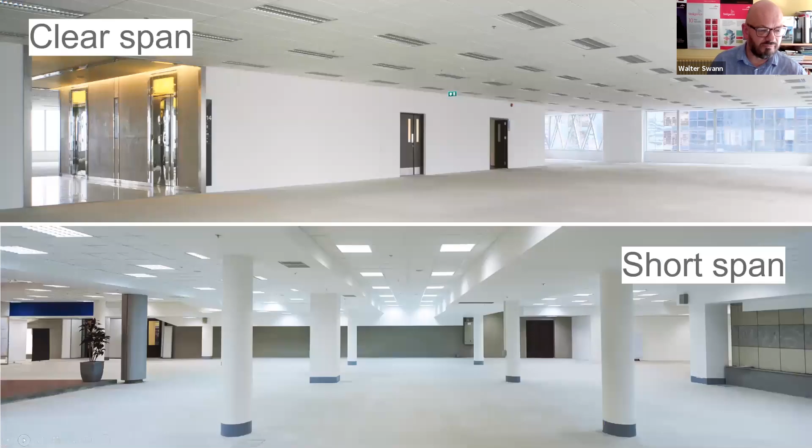But this one, as Justine said, is purely focused on the office sector. So the first image, we've got two photographs for you: one of a clear span kind of office block, and the other one of a short span solution to a similar type of building. Hopefully there will be a question which will pop up on your screens.

We really just want to get an idea of what your views are in terms of both cost and the environmental impact. Do you think that the clear span solution is going to cost more? Do you think that the clear span solution will have greater environmental impact? Now, the mischievous people amongst you may want to play a game and really knock us off track, but it'll be good to know what you think.

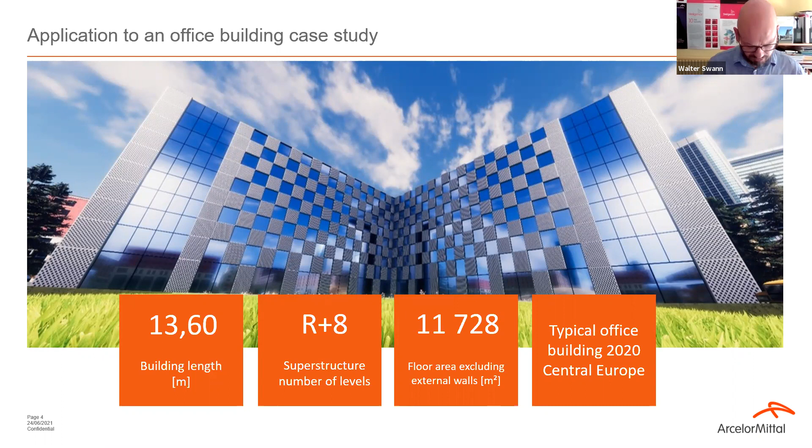And with that brief, they then took a look at the way that that sort of building would be built in Central Europe today, and they did that by doing a little bit of market research.

So those were the two schemes that they looked at, with that baseline scenario representative of European practice being used as the control, and used to measure the ArcelorMittal best-in-class solution scheme against.

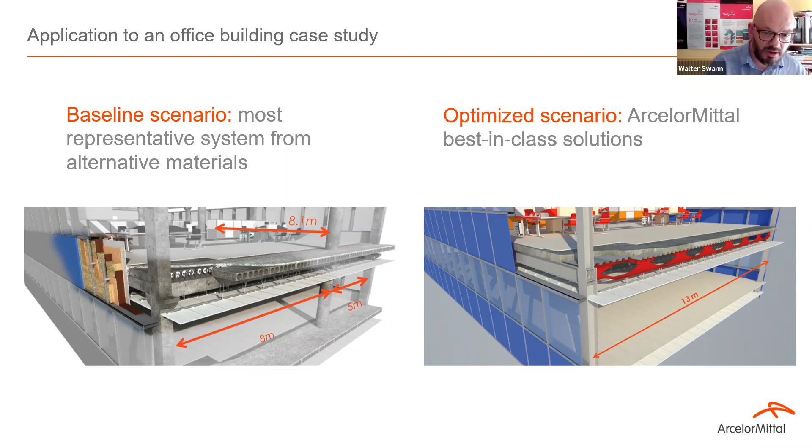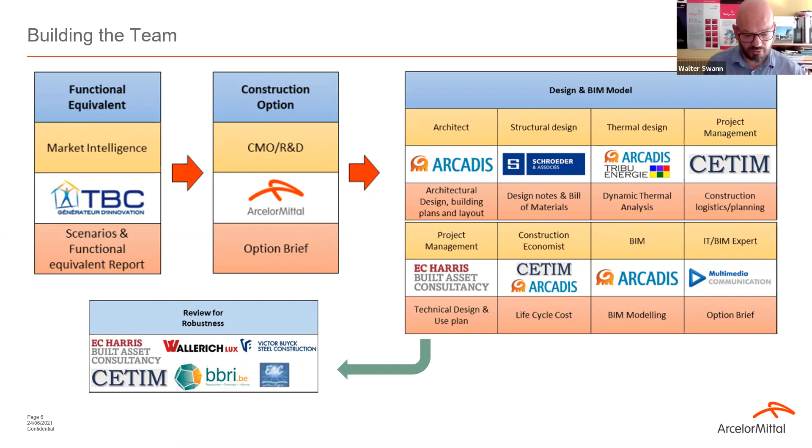The next step in the process was basically to establish the framework and the metrics that we'd use as the basis of assessment.

So 17 indicators were chosen, and they included environmental factors such as energy efficiency, consumption of natural resources, end of life scenarios, and reuse and recycling benefits. We also looked at the economic aspects of the build as well.

That involved a life cycle cost assessment before use, but also during the use stages as well. We also looked at speed of construction and the quality of construction.

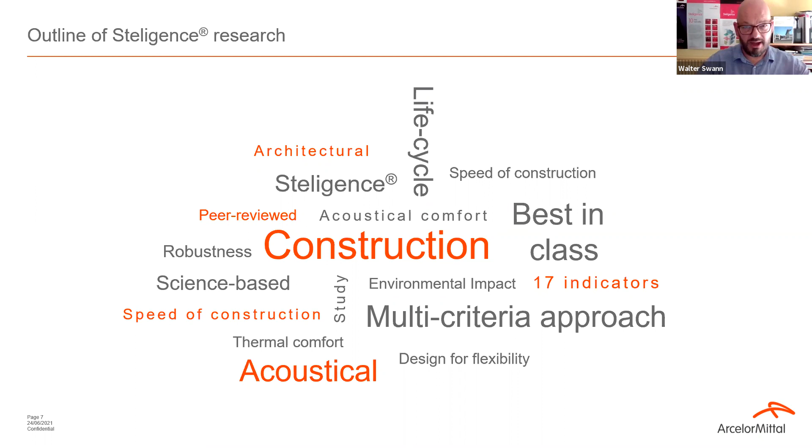And then in terms of the social factors, we looked at thermal comfort, indoor air quality, acoustical comfort, and design for flexibility, and tried to embody all of that in the assessment of the two schemes.

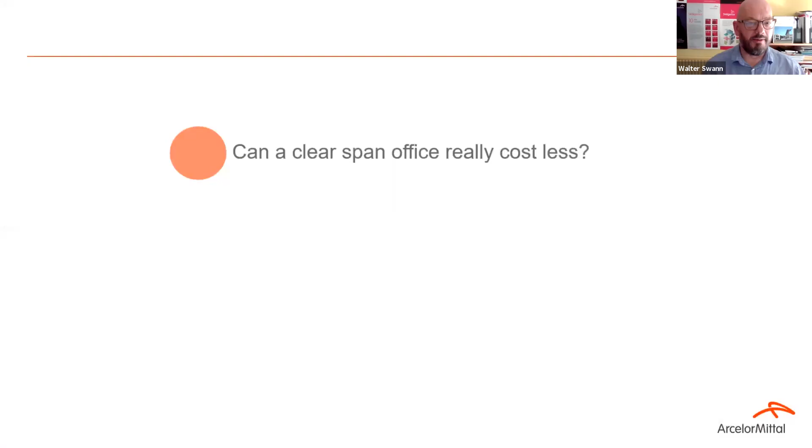So moving on to those two questions, and trying to tackle the first one: can a clear span office really cost less? And of course, the simple answer is, well, yes, we think it can, and that's what the study demonstrated to us. So what sort of things made that possible?

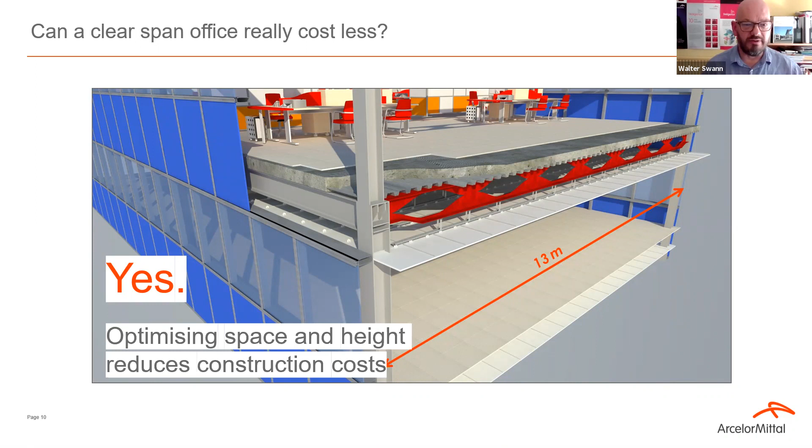Well, really all of the work was in the floor zone. That was the key to it. And the element which played a significant part in that was the beams, the Angelina beams, because that allowed us to integrate the structure and the services, which allowed us to engineer the overall floor zone down slightly.

That had a knock-on effect in terms of the total building height, which reduced, and of course that had an impact in terms of the facade area that we needed, and therefore the facade cost too.

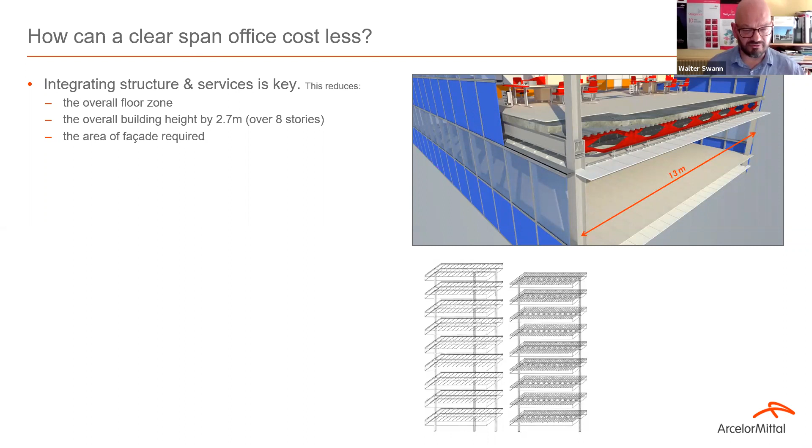Those Angelina beams, because of the web penetrations, allowed us to pass services through the beams. But they also created that added value, which is sometimes a difficult thing to put a price on, but it allowed us to eliminate that central column and give something which was much more flexible in use, and would possibly allow a longer design life as well.

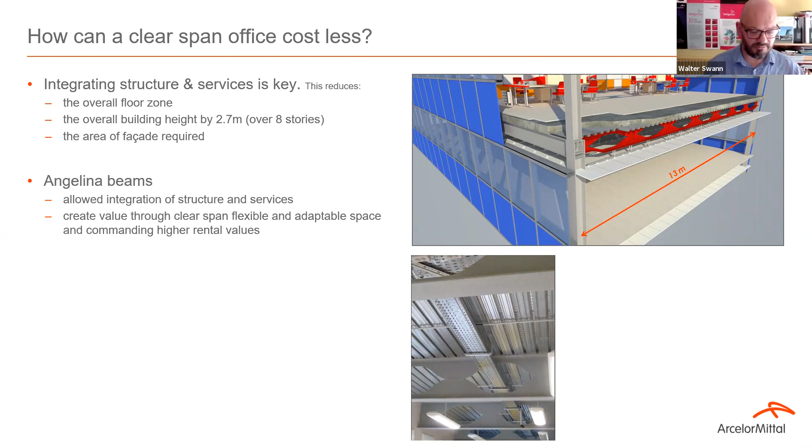We also employed a decking product of ours called Cofraplus 60, which allowed us to reduce the construction depth of the slab. It's a trapezoidal profile in metal, and it effectively uses less concrete and also less steel compared to some of the decking profiles as well.

But you can see from the diagram at the bottom that those two things allowed us to reduce the overall floor zone by 300 millimeters per floor compared to the base case.

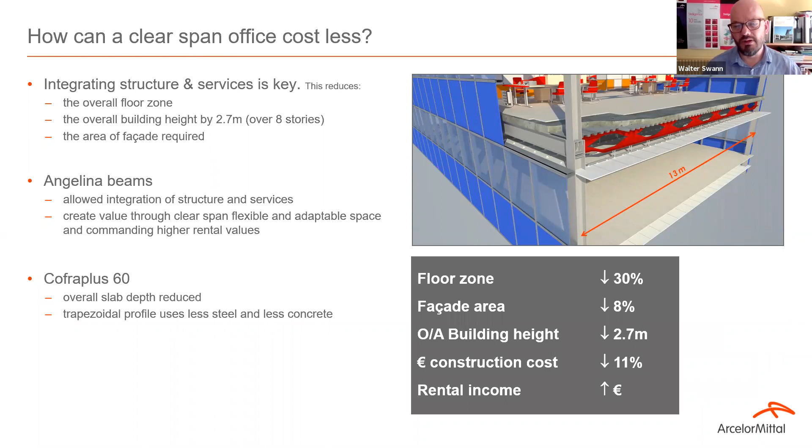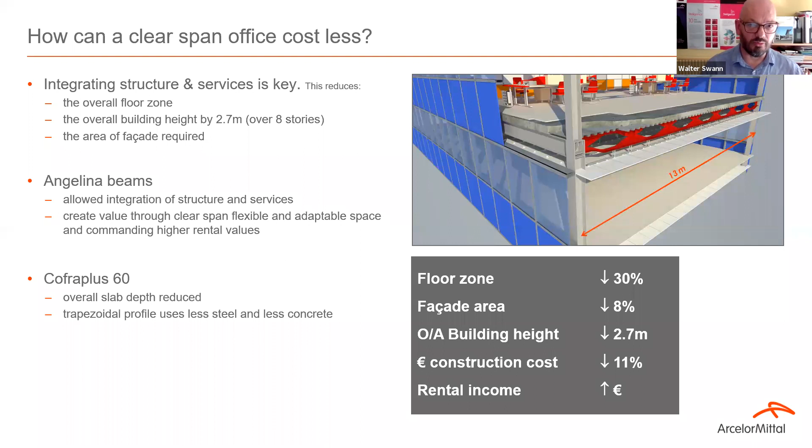So when you couple all those things together, you got the reduction in floor zone, the reduction in facade area, the reduction in overall building height. That led to a reduction in total construction cost of 11%. And because of that longer span, you're actually increasing revenue as well, because you've got something which is more marketable on the rental market.

I'm just going to sidetrack briefly and talk to you about Angelina Beams. Some of you may be familiar with castellated beams, you may be familiar with cellular beams. The Angelina is a variant of that process, which is particular to ArcelorMittal.

Similar process - you've got a one-pass cut, which is variable. The geometry of the cut is variable, and you can engineer that as part of the design process. You separate the two T's after you've cut your parent section in two, flip the bottom T through 180 degrees, and then bring those two T's back together and weld them together.

What you end up with is a beam which is probably 50% greater in depth, so it's 50% stronger for the same weight of material compared to the parent, and probably about 100% stiffer as well. So you're getting the steel working harder, in very simple terms, with the ability to integrate the services in the case of a floor beam.

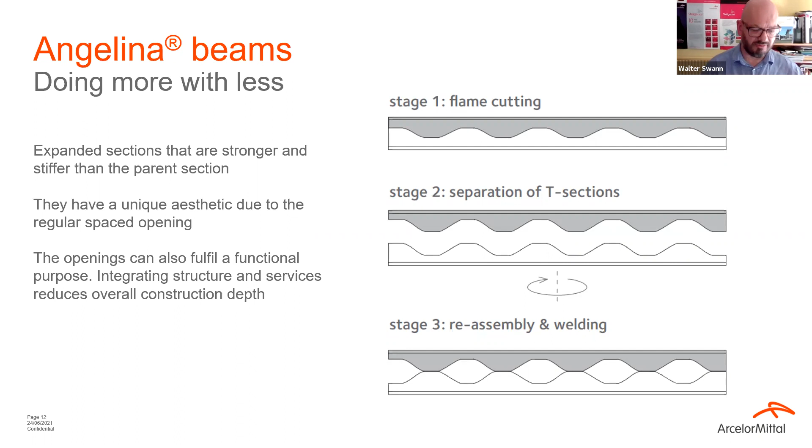The openings themselves, as I mentioned before, can be engineered. The key thing about any kind of cellular beam is to have an understanding of the secondary vierendeel effects around the openings, and to have a rough idea of whether they're going to be significant in terms of the design or not.

Generally that relates to the load placed on the beam. If you've got a light load, such as in a roof application, the vierendeel effects around the openings generally aren't significant - they don't dictate the size of the beam. That means the openings can be more generously sized, and effectively you maximize that lever arm between the top and bottom T's, which gives you a much lighter, much stiffer, much stronger section.

When it comes to a floor application, your loads have increased roughly tenfold. That means the vierendeel effects, that shearing motion across the cells, start to become significant in terms of the design, and that impacts the geometry you can choose in the cut. It generally means the shape of those openings has to be a little more modest. So: roof applications, big opening; floor applications, smaller opening to control the vierendeel effects.

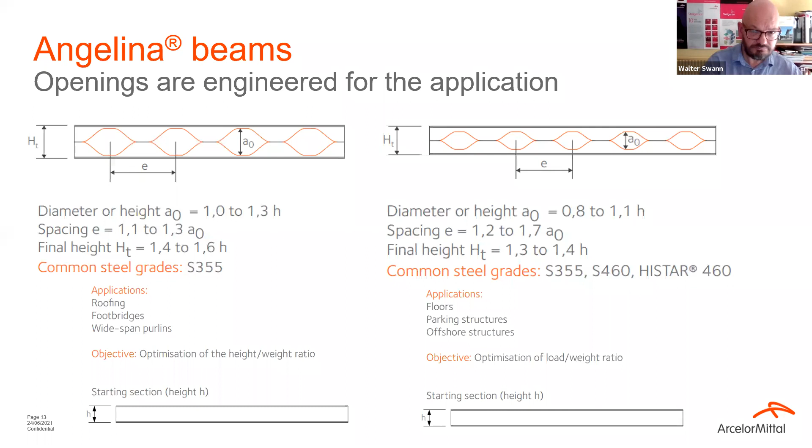So that's a very brief introduction to Angelina beams. Just a brief visit to the Cofraplus - what is it? The Cofraplus 60 is basically a 60mm metal deck, a fairly common profile in the marketplace. This one is stackable, so it's easy to transport. It also has a trough spacing of about 200mm, which is a little different to some things anybody from the UK might see on the UK market.

So it means that if you need to get the shear studs that provide the connection between the beam and the slab working a little harder, that 200 trough spacing can help you. But in the context of the Steligence study, the contribution of that deck was actually reducing the volume of concrete required. And if you reduce volume of material, generally you reduce cost, and if you reduce cost, you'll generally reduce carbon as well.

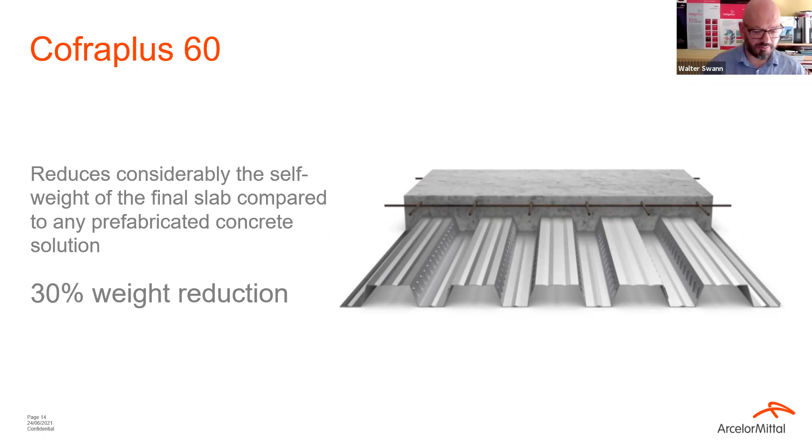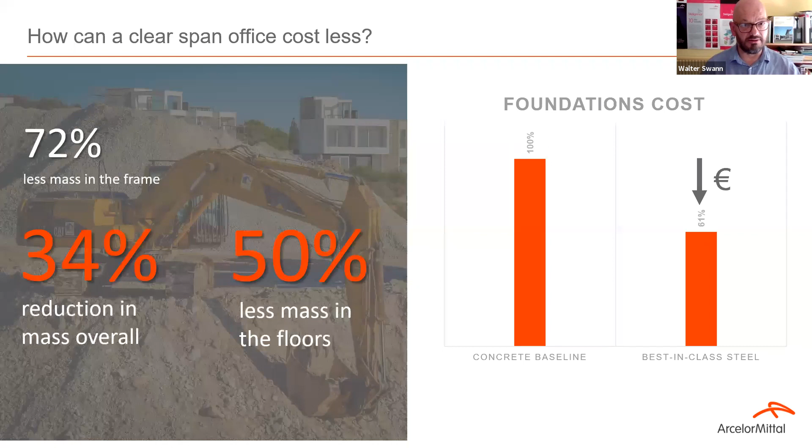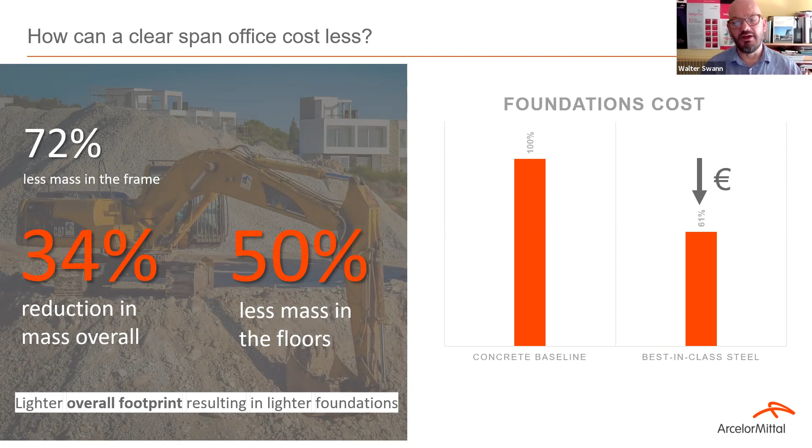So if we now take a look at what happens in the ground when you add all of those things together - when we looked at the steel frame, we found that the steel frame of the Steligence solution was 72% lighter than the base case. The floors were 50% lighter, and overall the building had 34% less mass. So that was a much lighter footprint on the ground, and that translated into both material and cost savings in the foundations.

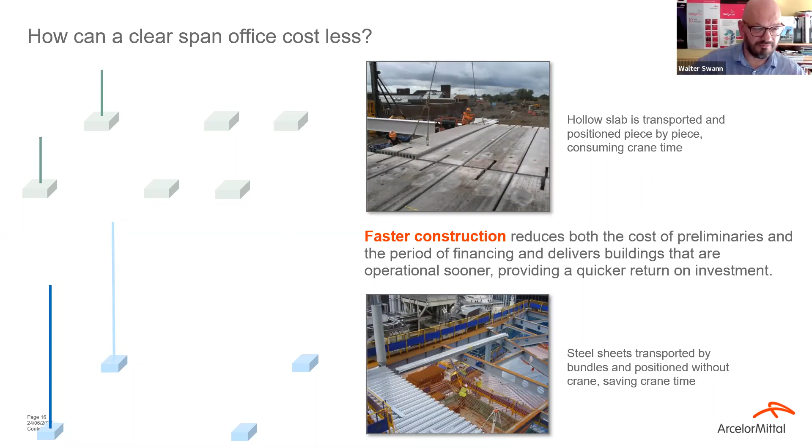The precast columns are generally quite heavy, so to some extent they're limited by how many you can get on a wagon, so they'll tend to be a one-story lift, whereas the steel columns tend to be three-story lifts, so they go up a little bit quicker.

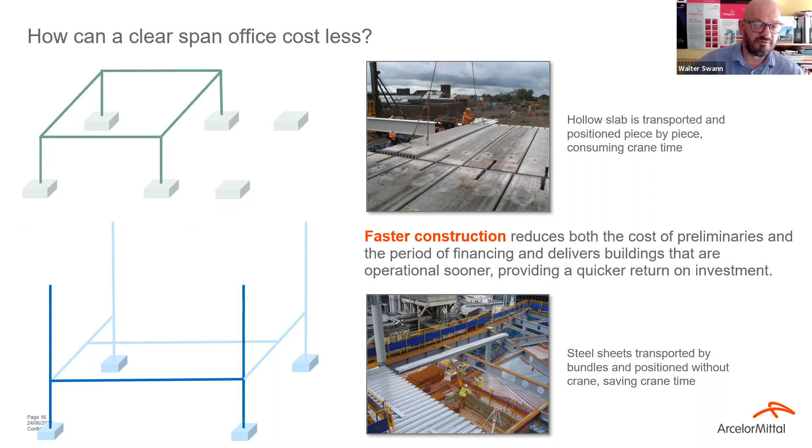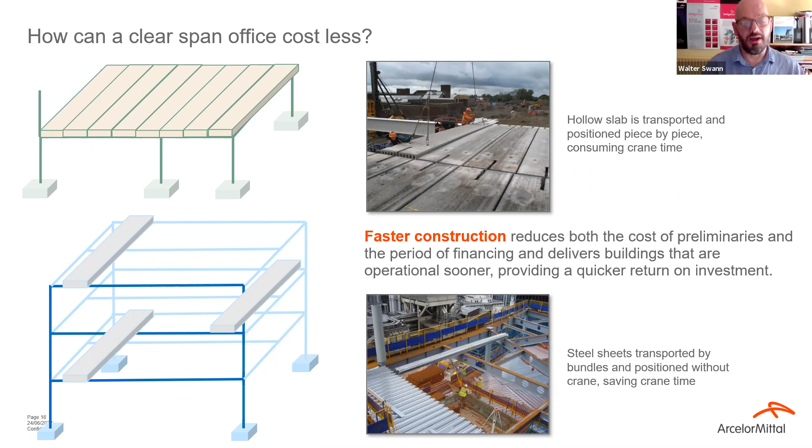Just to wrap that section of the presentation up, there are some direct cost savings you make by adopting that approach, and this is what the study showed: a 13% cost saving in the envelope, 39% cost saving in the foundations, and a 24% saving in terms of prelims and that type of thing, because the building was basically built 3 months quicker than the base case building.

That essentially means the client can get a return on his investment much more quickly, so you can get that floor space rented out and start generating income. So roughly about a 10% added value impact due to all of those direct impacts on the build of the project.

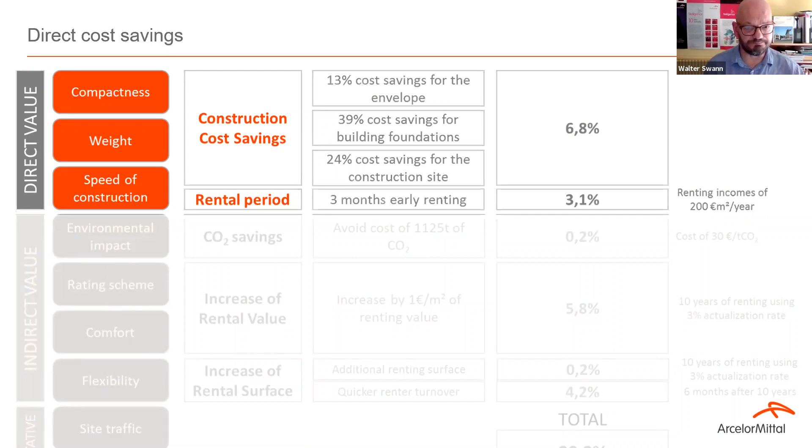But now moving on to the second question: can a clear span office have lower environmental impact? And again, no surprises here - those two questions we asked at the beginning were rhetorical questions. So again, the answer is yes, it does have lower environmental impact.

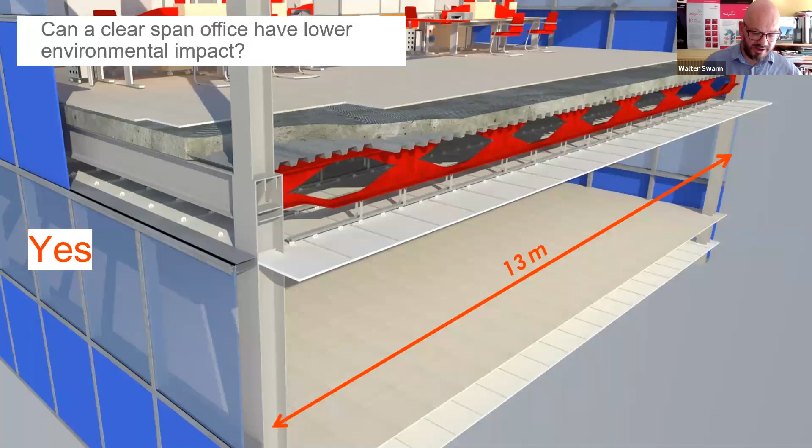So how, again, is that possible? Well, it comes back to that compactness - the ability to control the floor zones. As well as offering a cost saving, you also get a carbon saving or an environmental saving too.

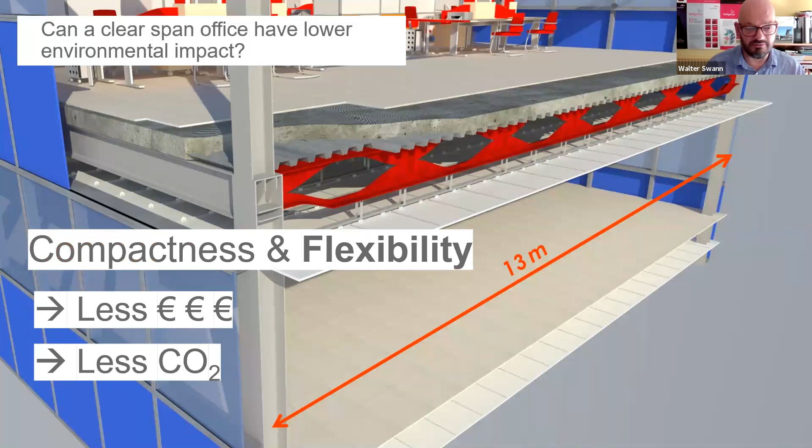Just drilling into a bit of detail here - what did the Angelina beams do? Well, first of all, they created value by taking out that central column. You've got a more valuable space, but they also contributed directly in terms of carbon reduction.

The Angelinas were designed in HISTAR 460, so that meant we could get the beams as light as possible, using the least amount of material possible. But with those holes, we could also maximize the web penetrations to give the maximum amount of space to pass the services.

The manufacturing process we use for our steel, the sections the Angelinas are made from, is an electric arc furnace process, so you've got a product with low embodied carbon. You've also got benefits in terms of reducing overall building height and reducing the cladding, which brings secondary carbon savings on the rest of the building.

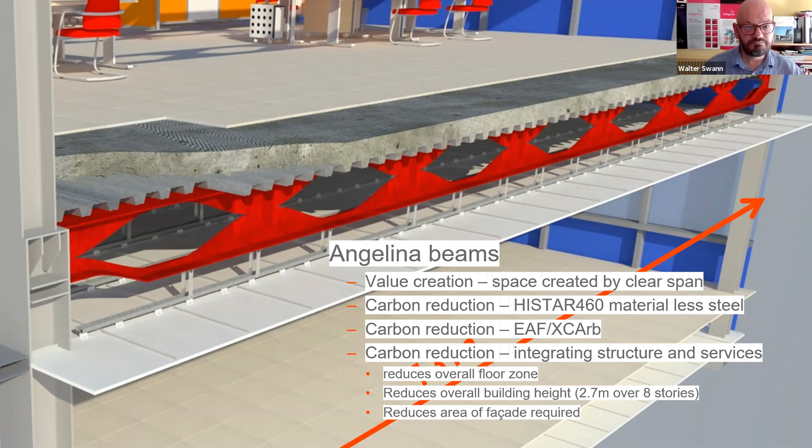If we move now to the Cofraplus 60, the sorts of impacts you saw in terms of cost also apply in terms of carbon. You've reduced the amount of material by using that trapezoidal profile rather than a reentrant profile, and reduced the slab depth, and that all translates into reductions in carbon and a reduction in the overall environmental impact of the building.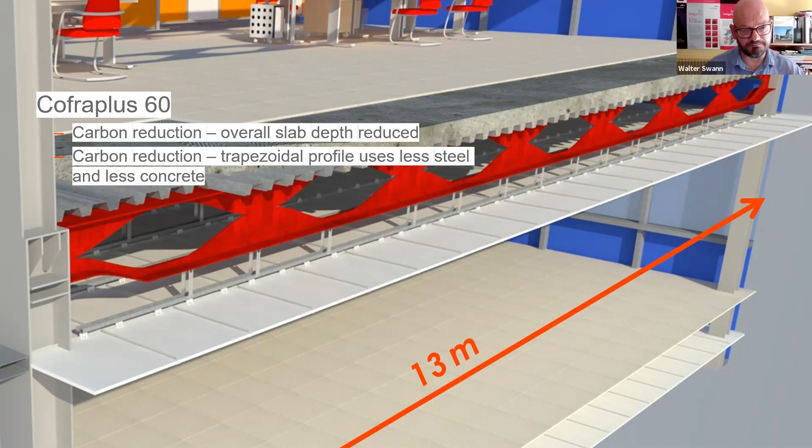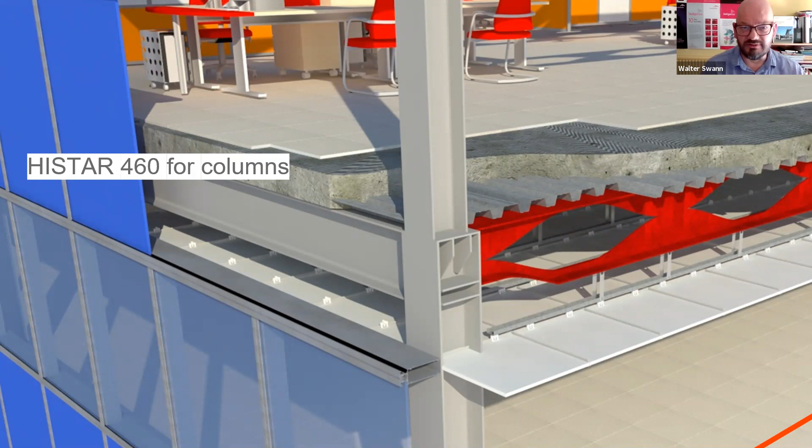Finally, looking at the columns, in the Steligence alternative we chose to use HISTAR 460 for the columns. My own personal view is this should be the default position for most multi-story buildings now, because straight away you get value creation, since your columns have a smaller footprint and therefore greater carpet area. Secondly, you get carbon reduction, because a 460 grade column will be lighter than a column in 355 steel. And compounded with that, the HISTAR 460 steel is made using the electric arc furnace process, which has a lower carbon footprint also.

And for both the Angelinas and the HISTAR columns, I'll talk about Xcarb, which is one of the latest offerings from ArcelorMittal, but I'll bring that up at the end of the presentation to explain what that is.

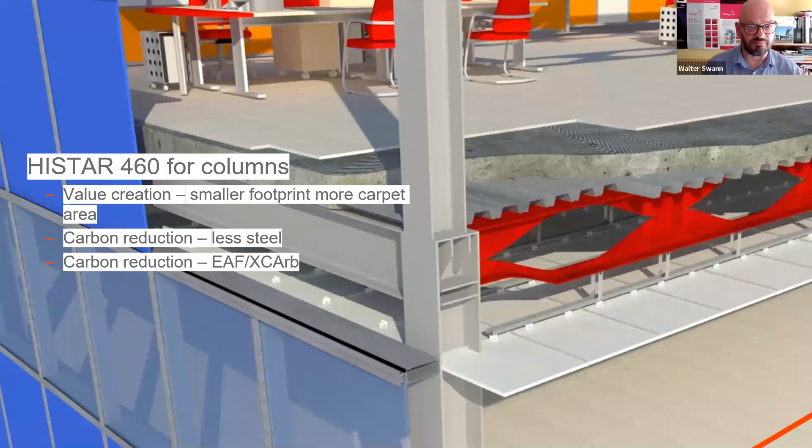So what did all that mean? Well, if we took those 17 metrics that I started with at the beginning of the presentation and put those into the magic box, effectively what that demonstrated is that the environmental impact of the building was reduced by 16% compared to the base case.

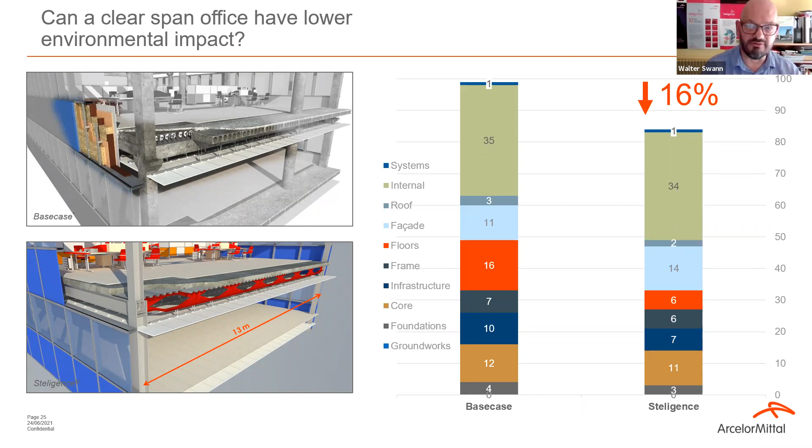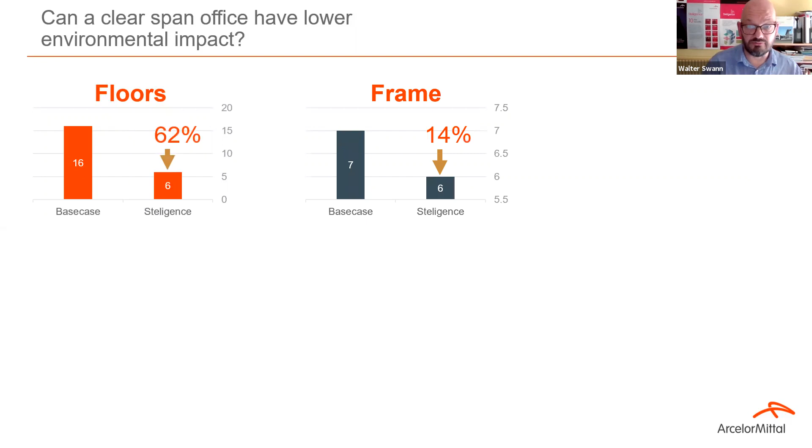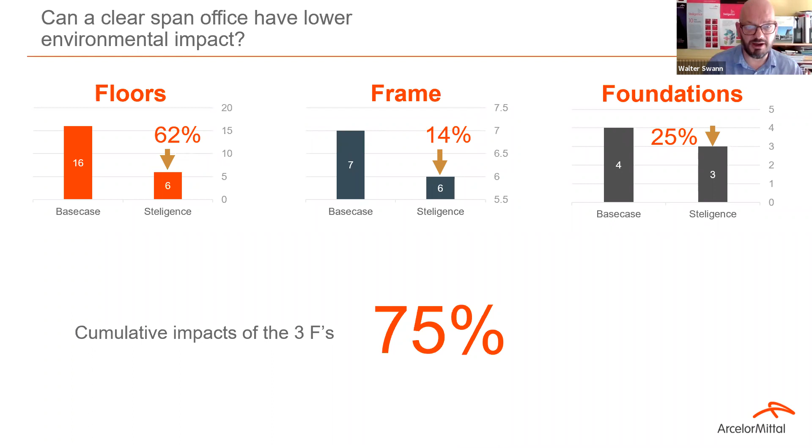If we look at the detail a little bit, if we look at the floors, the difference between the base case and the Steligence option was a 62% reduction in environmental impact. In the case of the frame, that was 14%. And in the case of the foundations, that was 25%. When you put all that together, those three elements, the three Fs, floors, frame, and foundations, accounted for 75% of the reduction in environmental impact between the base case building and the Steligence building. So a lot of the opportunity to reduce environmental impact lies with the structural engineer.

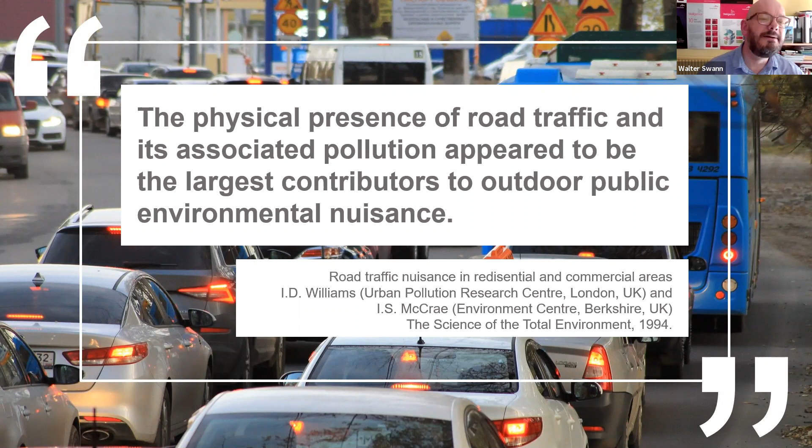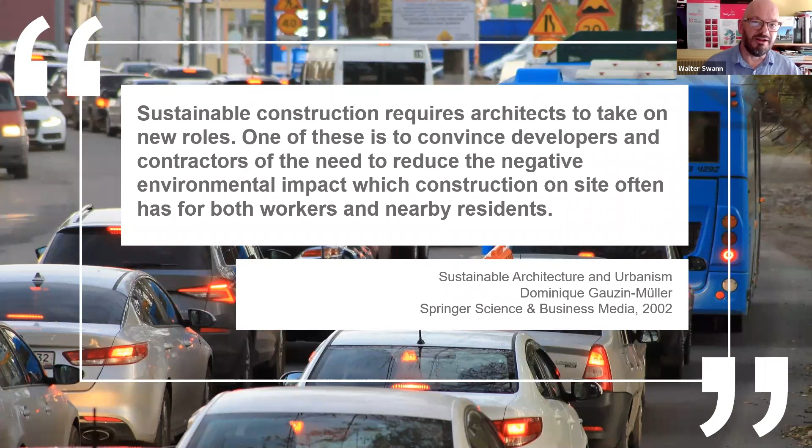Moving on to a softer aspect of impact, so talking about traffic now. Sites, probably as construction professionals, we probably love sites, but we probably wouldn't want to live near one. This quote and the quote afterwards simply make that point, that as a group of construction professionals, we should be thinking about the impact of both traffic and noise during the building of the projects we're involved in. And again, this is where the Steligence building could offer some benefits in this respect.

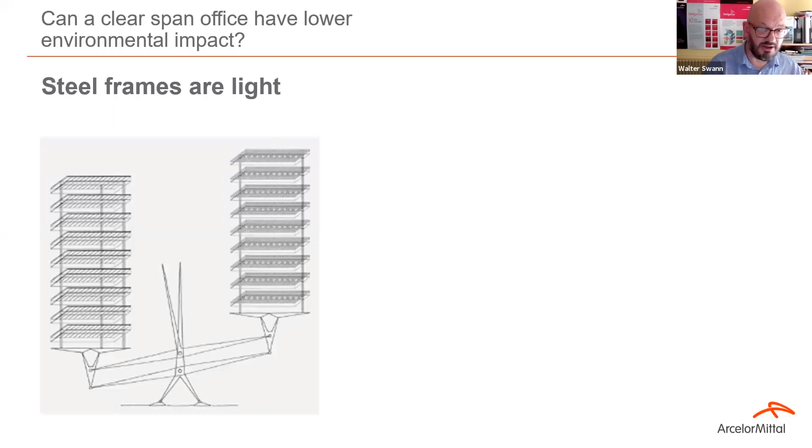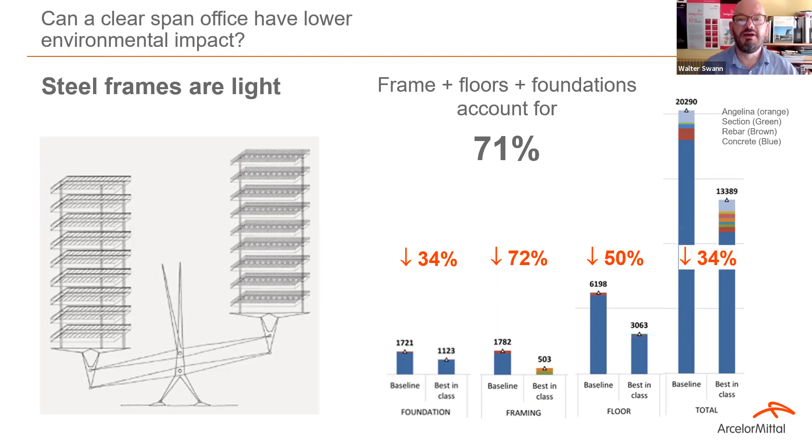Ultimately, it comes down to the same thing. The steel frames are lighter. The steel frame solution used less material. So these percentages here are the reductions for the foundations, for the framing, for the floors. Again, you see that it's those three things which have the greatest impact, and they accounted for 71% of the total reduction in mass in the building.

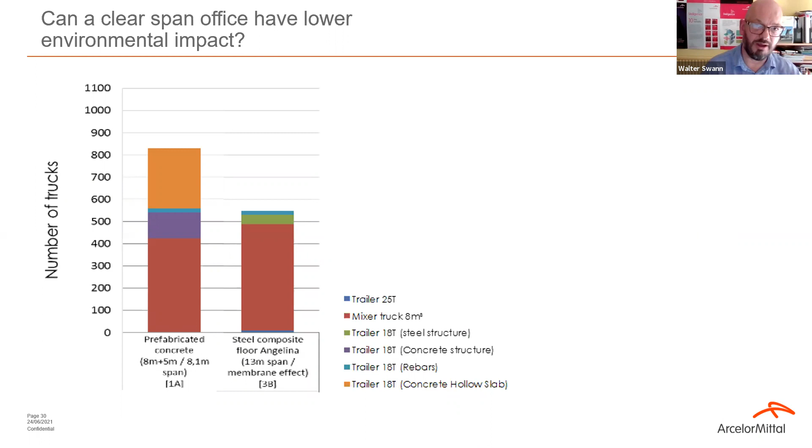So what does that mean? Well, if you've got less materials that need to go to site, that means fewer journeys from the delivery wagons, and that means less dust, less noise, less aggravation to those people local to the building site.

So the block on the left-hand side there shows the number of deliveries for the base case scenario. The thing which stood out from that was that it was actually the delivery of the precast units which peaked above the wall line, if you like. And then if you compare that with the deliveries associated with the steel frame, that's where the main differences lied. But the net result was fewer journeys to site with materials, even taking into account the fact that the steel frame had some wet trades associated with the laying of the composite deck.

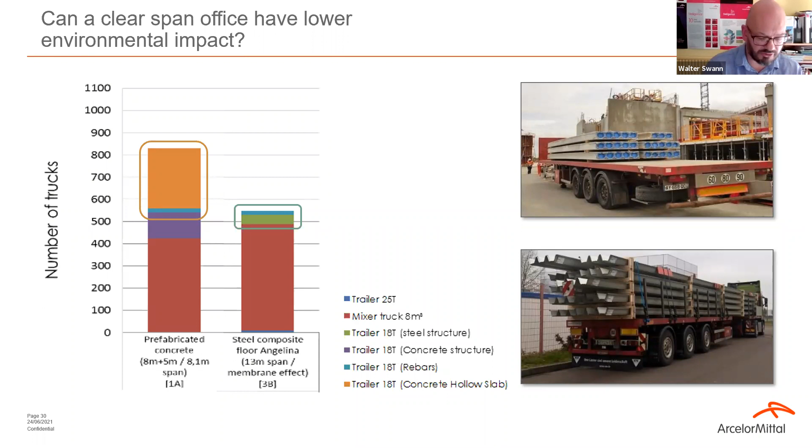So sticking with the environmental factors, but now picking up on those social elements of that. If we think about our building, one of the ways that we can regulate the temperature inside is by using thermal mass. That can take out the peaks and troughs of temperature within a building if you use it correctly. And the key to that, of course, is providing access to the thermal mass, and the vehicle for that is usually in the floors.

Now, it's about getting the balance right, though. So if you put too much mass in the building, that can actually have a negative effect, and it can start to lock in heat, which is then quite difficult to get out of the building.

So research has essentially shown that the optimum slab thickness for a diurnal cycle, so a 24-hour cycle, is basically 75 to 100 millimeters. If you combine that with nighttime purging, so where you open the windows and allow the cool air in, then during that nighttime period of about 6 to 8 hours, that's enough to allow the heat to be purged from within the slab that's been locked up during the day. And if you combine that with shading techniques and reduce the solar gain, then you can get that working to create the right sort of environment within the building.

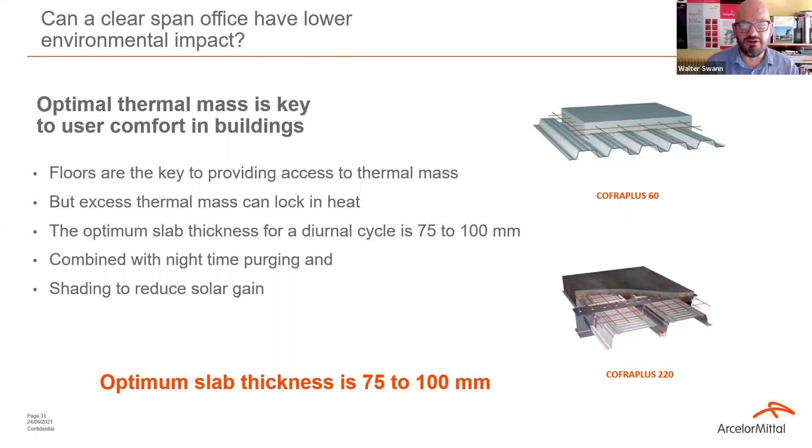But the key thing is getting the amount of mass right. And with the steel solutions, whether it's a Cofraplus 60, so a shallow decking profile, or a deeper decking profile, you've roughly got the right amount of mass to give you the best performance.

Coming up to the last few slides.

This is just talking about our best in class products and starting to look at where they can benefit you in terms of sustainability ratings or picking up points in terms of BREEAM and LEED. When we assessed our products, we basically only chose best in class products which could add value in terms of those environmental assessments.

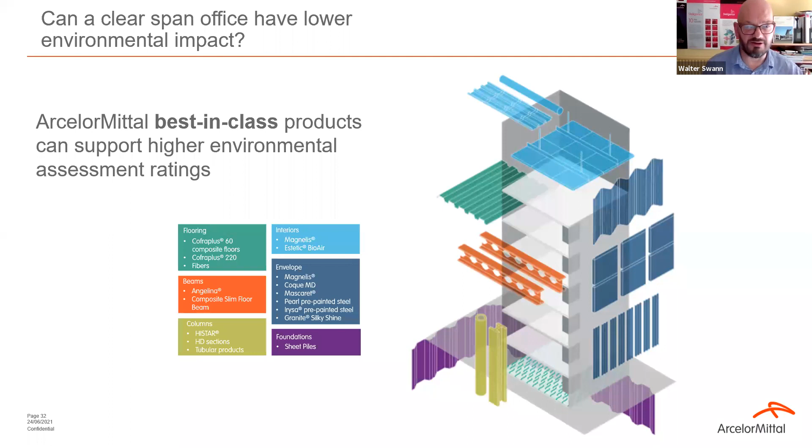In terms of BREEAM, by that collection of products that we used in the building, we added 3 credits. So the rating of the scheme went from very good to excellent in terms of the Steligence scheme. And in terms of LEED, it went from gold to platinum.

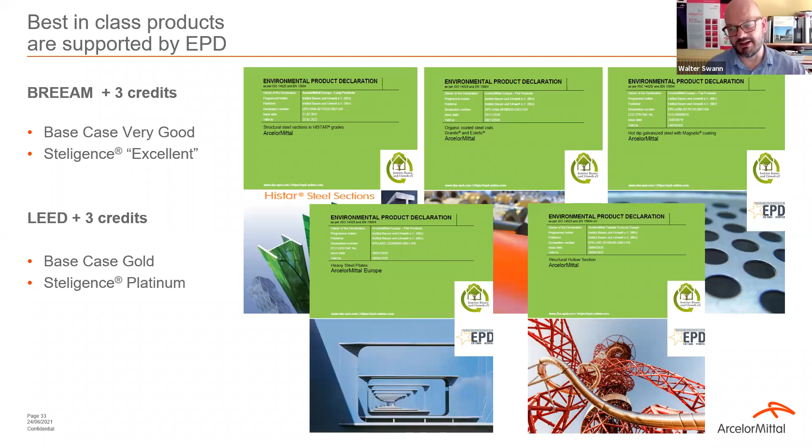The key to it all, though, was essentially the fact that we could support all of the products that were specified in that steel building with EPD. So you have all the environmental impacts associated with all of the materials that went into that building. A lot of knowledge, a lot of detail about the caliber of the buildings and the products that you're putting in the building.

Finally, on to a third question, which we didn't actually ask, but how can we make this building part of the community? How can we get people to like being around the building, like being inside the building? A lot of that is really to do with the huge palette of colours and textures that we can offer from our cladding materials, our organic coated materials.

So we've got things like Granite HD Extreme, which is a pre-painted steel, a 3-coat system, which we can guarantee for 40 years. I think that's in a C2, C3 environment. So that probably means that it's getting close in reality to being on the building for the full design life of the building, which is quite impressive.

And then if you're looking for different textures, we have things like Estetic, which are a little bit less mainstream compared to your regular profiled cladding. And then we've got offerings like Muralis, which again is a coated product, but where you as the designer can actually choose the pattern that goes onto the cladding.

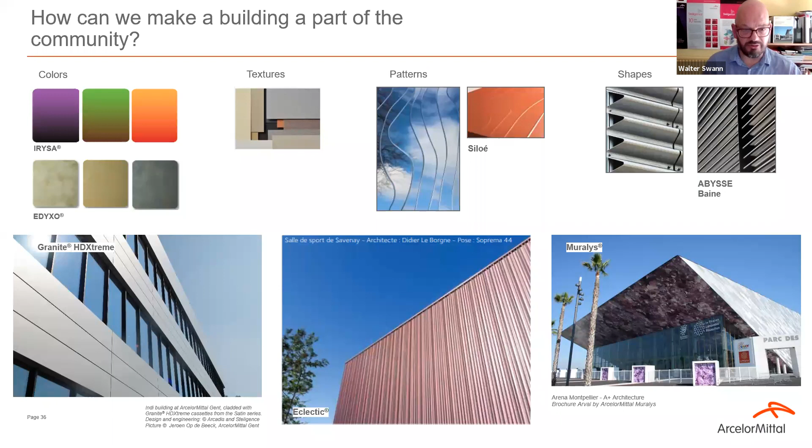So just to conclude, I think I may have one slide after this one. This is bringing all of those benefits together and trying to attach a value to them. The direct value was very easy, but actually when you look at the indirect value, we now have to pay for emissions to atmosphere in terms of carbon. So actually if you can save carbon emissions, then you're actually saving money also.

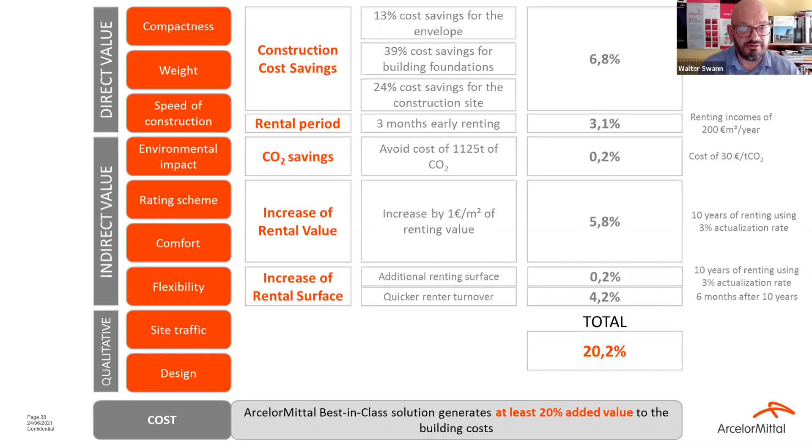So what I've actually done in that presentation is basically taking you through the 10 key benefits that were identified as part of that research program from ArcelorMittal's R&D department. So they were compactness, flexibility. We learned about the benefits in terms of environmental impact, the speed of construction, reduction of site traffic, better BREEAM ratings, and ultimately a better value offering.

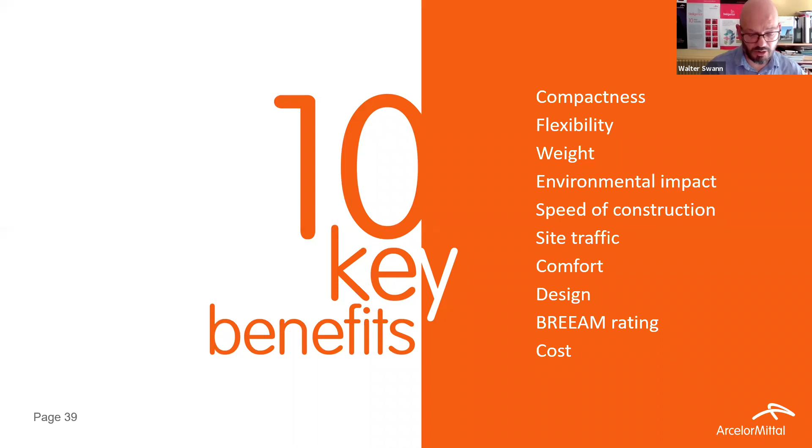And then I wanted just to end the presentation with an offering that we've brought to market quite recently. This is really in direct response to the climate emergency and this increasing need that we have to design out embodied carbon in our structures. So this is the way that ArcelorMittal are trying to play a part in that debate. And the Xcarb offering basically has three components to it.

If I start in the top right, we've got Xcarb, recycled and renewably produced. So we produce steel in two ways, principally. We produce electric arc furnace products, and the Xcarb recycled and renewably produced basically addresses those products that come from the electric arc furnace. And we've simply asked ourselves, how can we reduce the embodied carbon in those products? Now, they're already quite low in terms of embodied carbon.

But the principal thing that we can do, and we can do it relatively quickly, is by tying that electric arc furnace into a source of renewable energy. And by doing that, if there's demand for more of this product, that puts demand onto our energy suppliers to increase the rate at which they decarbonize. So that's what recycled and renewably produced is about. It's an offering which is basically tying the electric arc furnace into a decarbonized electricity grid.